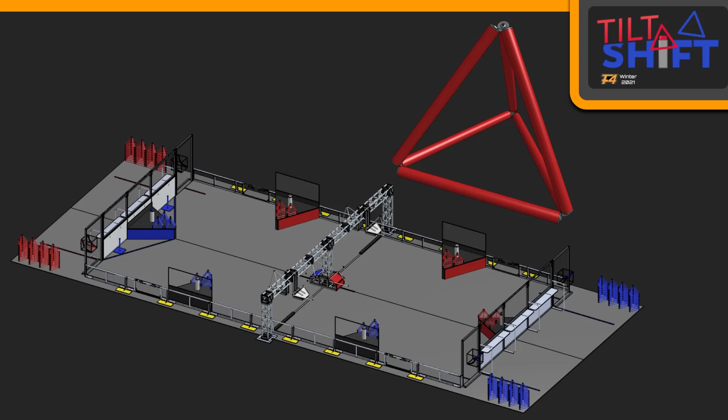Tilt Shift is a game played with 15-inch tetras on shifting goals. These goals can be locked in place by robots, and the tetras can be stacked on top of each other throughout the game. In the end game, the robots are allowed to hold and score up to 6 of the tetras, and they can climb onto those triangular platforms that you can see in the slide.

We've got a couple of first ones up, and unfortunately we weren't able to judge these 2 robots due to some issues with their submission, but we still wanted to show them to you because they're some cool robots.

So up first, we've got team number 423-2702, Rubbles. This team was composed of Fraser Morrison and Lachlan Morrison. Unfortunately, we weren't able to judge their entire robot, but as you can see, they've got a cool elevator and some interesting starts of a mechanism, as well as a swerve drive.

We're going to go through these first couple a little bit quick, just because we don't have much comment because we weren't able to judge them.

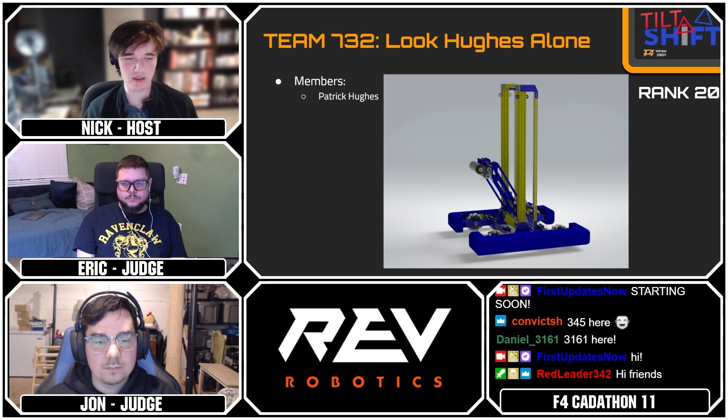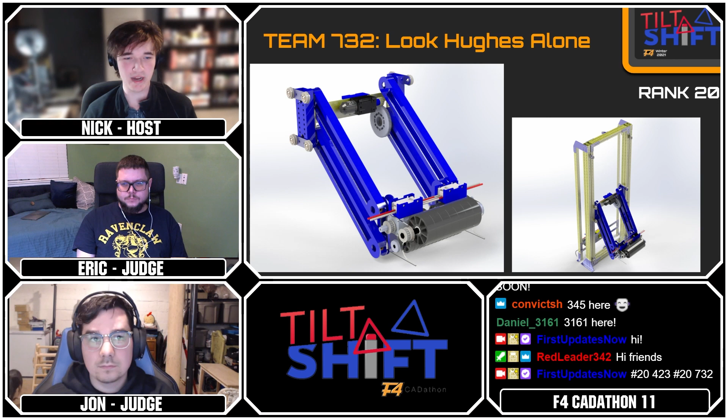Next up, we have tied for 20th, team number 732, Look Hughes Alone. This team was composed of Patrick Hughes, and they tied for 20th. You can see they've got a robot in there as well. They've got a cool little intake with some Spark Max holders on there, as well as a fairly large elevator. Really cool thing, looks very 2017 inspired. It's a cool robot, it's unfortunate we weren't able to look at it closer.

Now, as we get into our actual judging, I want to introduce our 2 awesome judges we have with us tonight. Right below me, we have Eric from Rev Robotics and formerly of Team 2826, Wave Robotics. And we also have Jon from team number 1684, Chimeras.

Welcome, guys, to the show. Thanks for having us. Yeah.

So these guys took a look at the judging. I did not do any of the judging, I will be interjecting and talking about some of these robots because I did look at them, but these guys did the real looking and scoring.

So let's get up to our first team, team number 403, which is made up of teams from 4561. What do we got to say about this guy?

Yeah, so it's definitely simplistic. I believe in their submission they said they didn't have a ton of time, but they were going for a simple passive mechanism so that way they could intake the tetras and then quickly deliver them. Very straightforward drivetrain. It was interesting that they went with 6-inch wheels. I don't know if that's because of the bumps in the middle that they were concerned about getting hung up on there. But yeah, just pretty much a pretty simple robot overall.

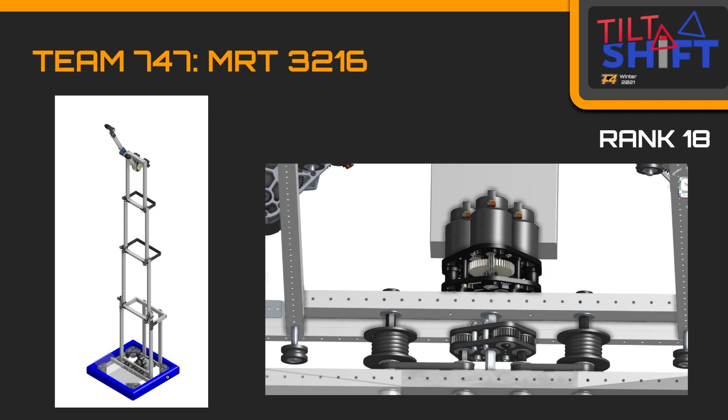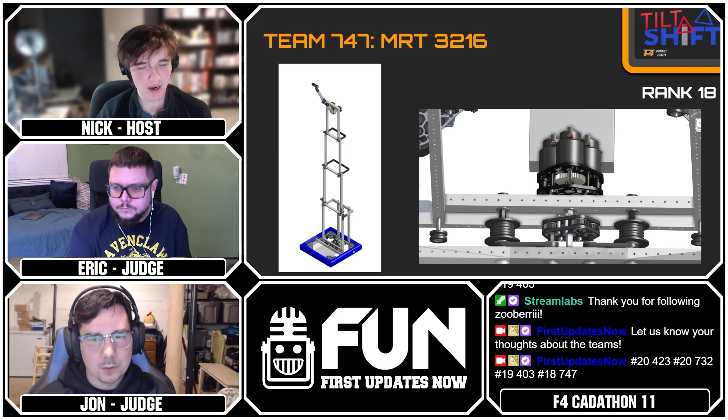The actual winching for the elevator was very cool, the way they had that set up. And the drivetrain was just really awesome too. I don't have a zoomed in picture of that, but I believe that was a swerve drive on that one. I don't know, Nick, if you remember if it was a custom swerve or if it was like the flipped MKs or something like that.

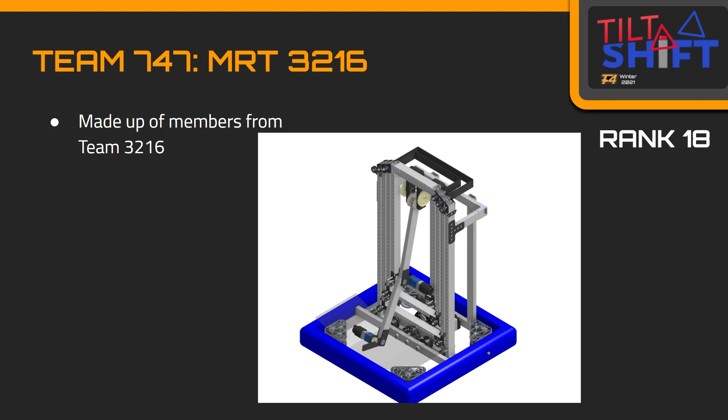It's always nice to see a robot that really takes the design of their elevator seriously, because anyone who's built one could tell you there's a lot that goes into doing an elevator in FRC well. So it's a cool stab at it on this robot. It's a really large elevator too, which is kind of interesting to see. Did they say they were trying to carry more than one? Maybe that's why it's so big.

Yeah, these Tetras were rather light compared to 2005, when they were like 9 pounds. So if I remember correctly, they were trying to go for reach. I don't know if one of the team members is in chat and can correct me, but I'm pretty sure in the scouting sheet they were trying to go for reach, and possibly stability. I want to say there was one robot that mentioned having more stages so the bearings would be closer together when it extended, which was an interesting approach.

That makes a lot of sense in this game, because it involved potentially very tall stacks at the high level, where the high goals started at about 5 feet in the air and got taller as you stacked more Tetras. So it's always good to think about that.

MK4i, they said in chat. That's what I thought it was. Yeah, really cool modules. It's cool to see some of the new swerve stuff that's been released in the last year show up on these robots.

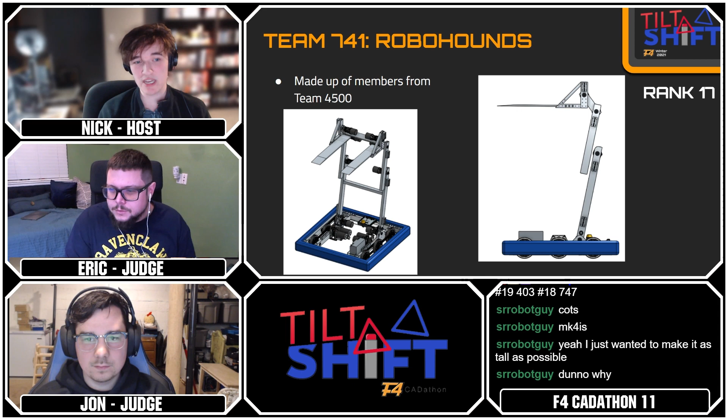All right, so next up we've got team number 747. Wait, not 747, that's 741, RoboHounds. I think it's messed up. This team was made up of members of team number 4500, and they ranked 17th, with the robot you can see in front of you.

This was me, and I thought there was an interesting design—kind of like an elevator, but each stage appeared to have its own powertrain. Then they had a passive intake on some arms, and I wasn't quite clear how they were planning to actually get the Tetras off of everything. I think maybe they were just hoping to put them on a stack and then drive back. But I think there was a little too much degrees of freedom in everything they designed to really make this a top level robot.

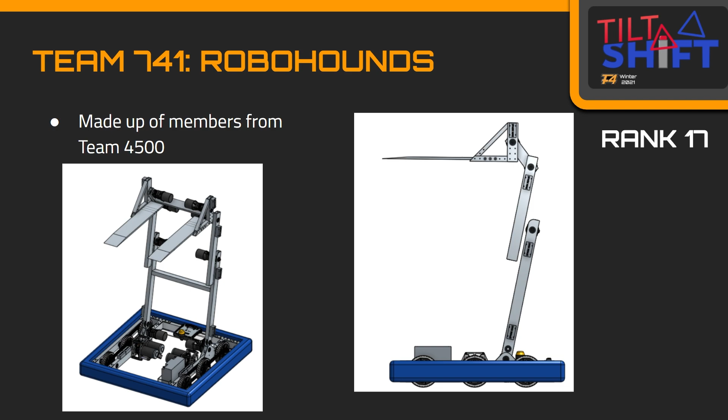I think hopefully they learned a lot of stuff, and ultimately that's really the goal of this whole thing—to expand your CAD skills. So interesting design, and there were scoring opportunities for that kind of low robot in this game. Going low was not necessarily a bad choice, especially if you were intimidated by the concept of one of those big elevators or something like that.

All right, so next up we've got team number 746, Mech Tech Dragons, made up of members of team number 422. These guys ranked number 16. This is me again. This was another simple robot—they were just grabbing Tetras and kind of pushing them off as fast as possible.

I think they had some good details. They were one of the only ones I saw and judged that actually designed bumper mount brackets—a lot of them just put bumpers on and they're floating in space. So they put details in places others didn't, which was good, but I would have liked to see some more detail up top. Great color scheme though—black and green is always good.

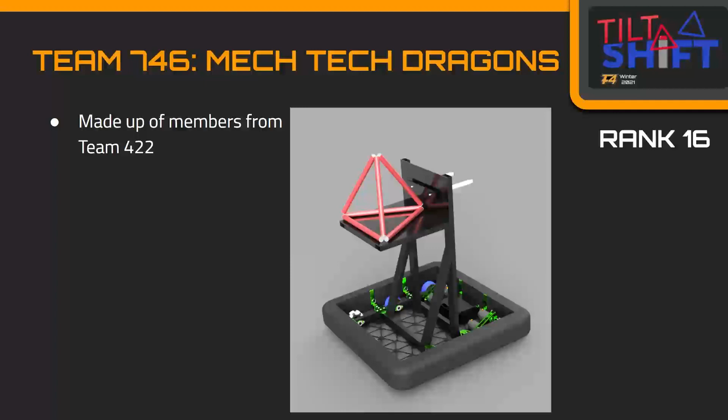Excellent color scheme, and overall not a bad concept. In a lot of games you could see teams load directly from the loading station without picking it up from the ground, and score as simply as possible off of that. Not a bad call at all strategically.

Next up, we've got team number 516, Alarm Clocked, who ranked number 15. Team number 516 is composed of Nathan Shepard, and we have one very long boy in that picture. This wasn't fully designed or fleshed out, so I had to kind of look and guess how they were attaching everything. The intake was interesting, and I'd like to see it built to know how it would actually interact with the tetras in a real life situation. I think they spent a lot of time on the intake and might have just run out of time on everything else.

Did it look like the intake was fixed at that angle, or could they rotate it? Do we have a better picture at all there, Tyler? No, okay, we do not. I don't remember, I'd have to pull it up again. I'd be curious if they were trying to be able to dump by rotating it around or not. Because it's angled, so it's angled with the tetra, I don't remember if it was articulated or not.

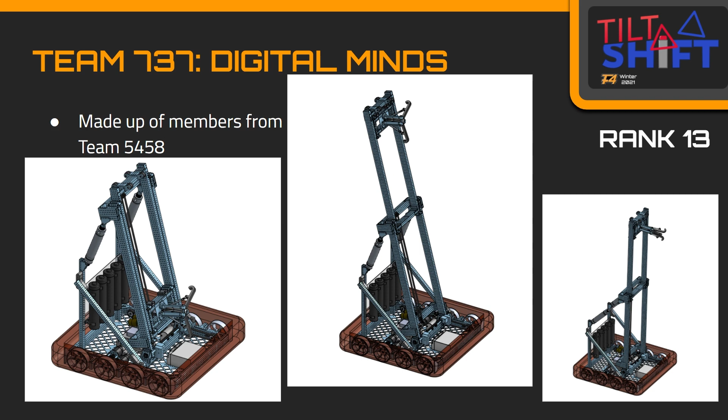Yeah, this was another one I judged, and I would have liked them to show some screenshots with their intake engaged with the Tetras, because I'm not entirely sure how it works. I think they're kind of trying to grab the two sides and a bottom, and the amount of lining up that they would require to always be where they need to be to grab it would slow them down. I think that was one of the limiting factors. Everything else was really good, but the intake - that was kind of a running theme on more things I judged - all the intakes I felt needed too much accuracy and lining up with the Tetra instead of just grab and go, especially in a game where the defense is pretty limited.

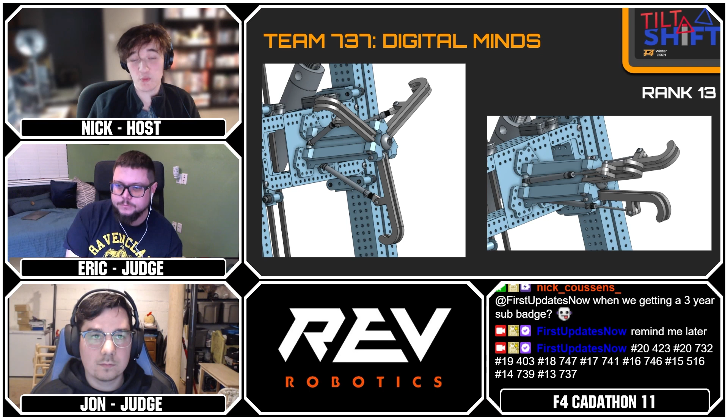Yeah, I dug into this intake a little bit, and it's a really cool little linkage type intake deal, right?

That kind of hooking and action is really fun to see in teams that use that mechanism. It reminded me a lot of some of the hatch grabbers you saw in 2019. Well, for these you start stacking the game pieces up, and if you look at the screen, it's closed and holding it, and when it goes to let go, it's going to hit all the pieces it's putting the next one on. So I think it's going to get stuck. Yeah, that's tricky stuff, and if this game was played for real, it would be a very hard game because of that.

But I liked their banks, like their nice air tank bank. I liked that they had an angled, articulated elevator that allowed them to get a taller elevator to start, so they could have fewer stages but still get the height, all that stuff. So there was some good forethought in there. Very cool robot, nice job to team number 737.

Next up, we've got our 12th ranked team, number 751, Team Electron, made up of members of team number 3928. This was one of the robots I judged. I liked the combination of short elevator, long arm, though I felt like the pickup may take a little bit to line up. However, once you had it, I thought compared to some of the other robots in the CADathon, they did a good job of trying to capture the sides of the game piece.

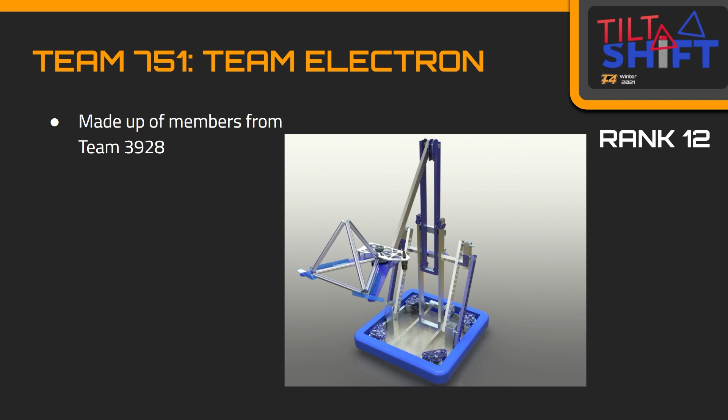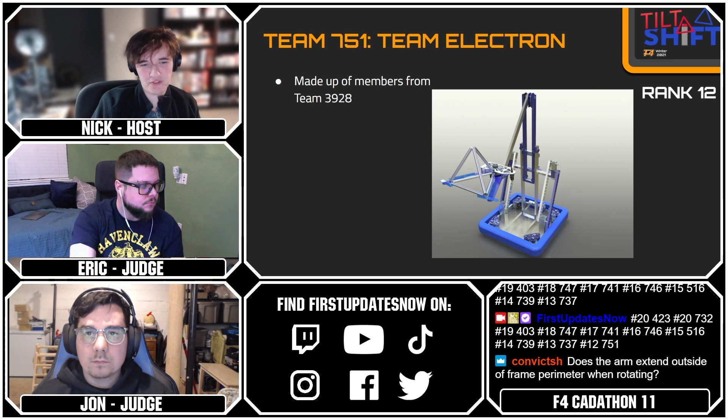And as far as placing goes, kind of like what Eric was just saying, as soon as they set that on and let go, they're hands off and it's free and clear. They also went with a swerve drive, and if I remember correctly, I believe that's a suction climber on the back of this robot. I don't have my notes pulled up, but yeah, I believe so, suction climber on the back. We saw a lot of those, at least a couple on my side, so a lot of teams taking inspiration from 2019 in a few different ways.

Yeah, and I think that kind of placement mechanism, like being away free and clear, that's something several robots might have had good grabbers for, but they didn't necessarily have good placers. In order for them to score, the piece needs to be on something, right? Getting them is only half of the battle.

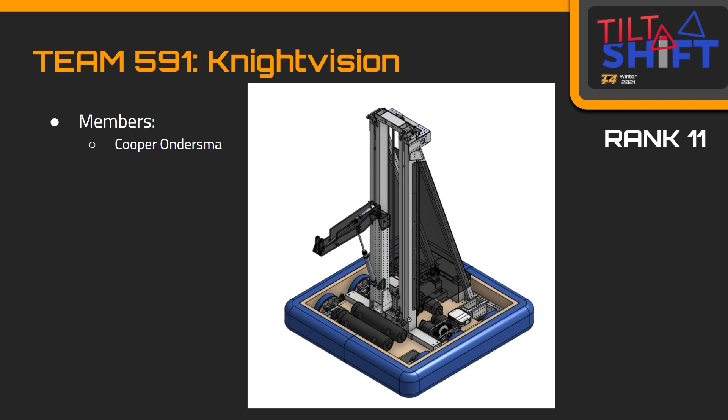Very simple mechanism as far as placing, it goes back and forth, where you don't really know how well it would work until you actually built it and tried it. But for this one, I figured if they had something hooked, they went up and then retracted the pistons or folded down, they would be able to clear before colliding. I don't think they would get entangled or anything. And then a really robust elevator with good elevator mounts, which is always nice to see.

Sometimes people will mount an elevator and put very little support, where here they did a good job of adding that extra support, and the paneling on the side too just ties everything together. Then the elevator motor looked fast, I don't know what the gearing was exactly off the top of my head, but it looked fast. We've built fast elevators, so I like fast elevators.

I think this is a really good example of that kind of meat and potatoes, tube and gusset style robot, where it's really solid, it just looks very solid. And as much as I love seeing swerve drive on robots, it's also nice to see when teams commit to just something simple, and that's what they did with the drivetrain, just a super simple drivetrain that looked like it would work really well.

About 1 second to full extension, that's what chat just said, copper131 just said. Nice. So great robot, Cooper.

Really cool one to look through.

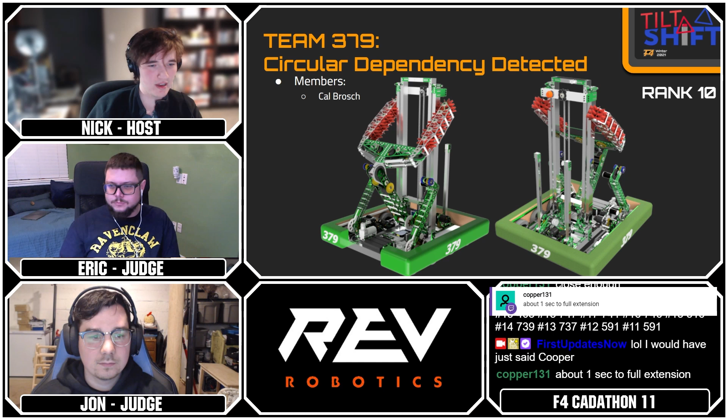Next up, we've got team number 379, Circular Dependency Detected, which is composed of Cal Brosch, and I'm sorry if I pronounced that name wrong. They ranked number 10, and this was a really cool robot to look at and poke around with. I think Eric, you judged this guy.

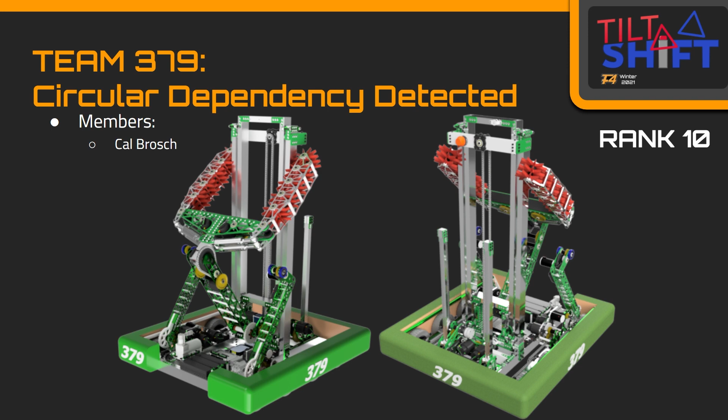I did judge this one, and I think they were one of the most complete robots, a good climber based off of the 2019 climbers trying to get up on level 3. Tons of detail, fantastic all around, but there were some things that I thought limited them, and one of them was the intake was massive, and I actually don't think it holds the Tetras at all.

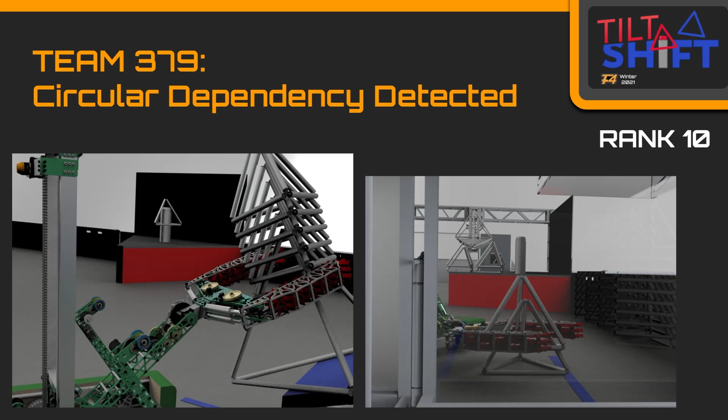Because I think they come on the outside, and all those stars, I don't actually think they're gonna hold them the way they think it's going to. I could be totally wrong, but if it does hold it, I think it will be relatively good at taking, actually scoring and placing everything.

And I think the kind of images that showed up in here with kind of stacking them in place also, I think that kind of strategy is interesting, right? Because doing stuff outside your robot is always a little bit of a risk, right?

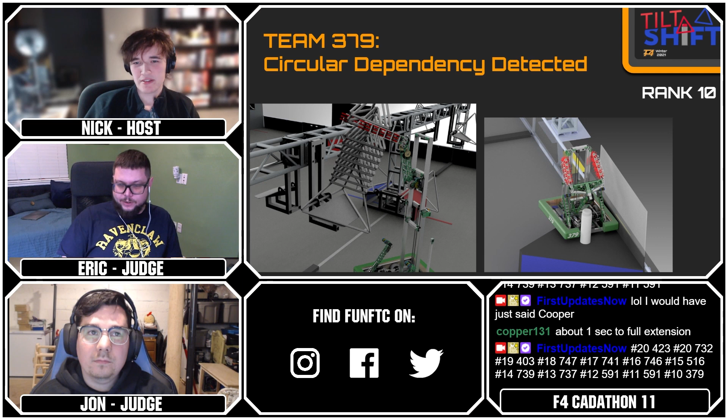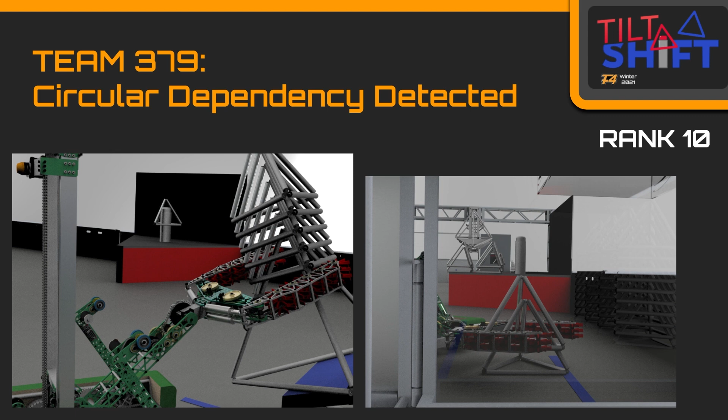Oh, absolutely. And it's also a lot of weight to manipulate and everything, so they're going to be draining a lot of power. So hopefully they have enough power at the end to actually climb. It does look like they have pistons on the back, so it does intake, kind of a pinching action going on. So it might be able to compress and hold those, but I don't think it'd be able to compress and pull them in. Very interesting.

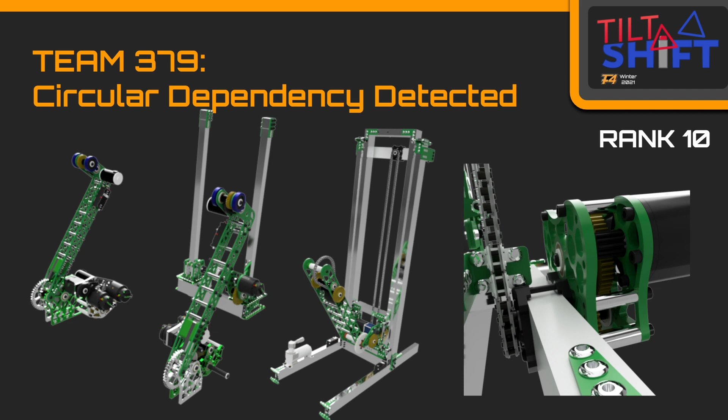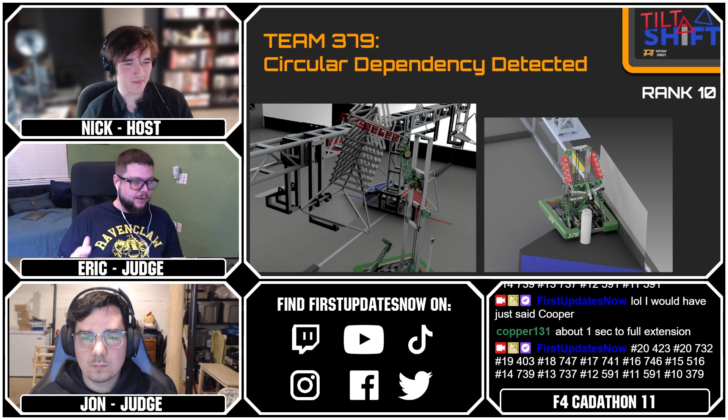And I took a quick look through this one. I've seen some 379 robots in my time, this is a good 379 robot, really cool, really well designed. I ranked them high on manufacturing and detail. I kind of docked them a little bit on strategic design and execution, just because of how massive the intake was. But as far as competitiveness, I thought it'd be pretty competitive, and obviously it's a well designed robot CAD wise.

All right, so next up we've got team number 362, Confused Diesel Mechanics, made up of members of team number 2168. These guys ranked number 9 with that very cool little robot.

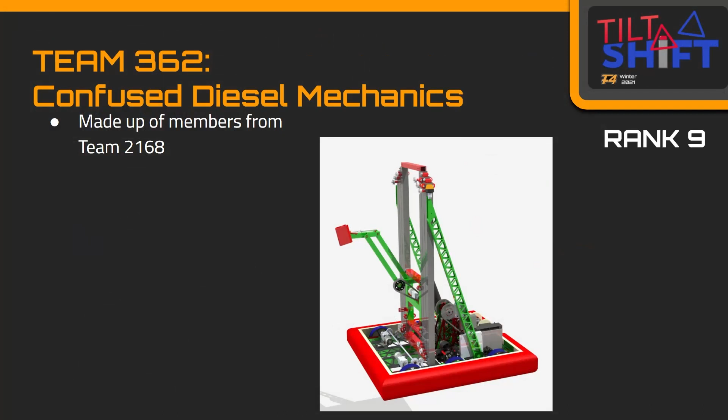This was me again. I don't remember a lot about this robot, looking at it again, this was probably one of the first ones I judged. That's why. But there it is - yeah, the 1114 climber from 2019. Relatively simple intake, and then just a nice elevator, and I think they really excel at climbing. I think their goal was to get up and get down off the platform, so that's why they went with this thing. Overall I think it'd be a pretty competitive robot, with some good design choices and simplicity in places where simplicity makes sense, and complexity where complexity made sense.

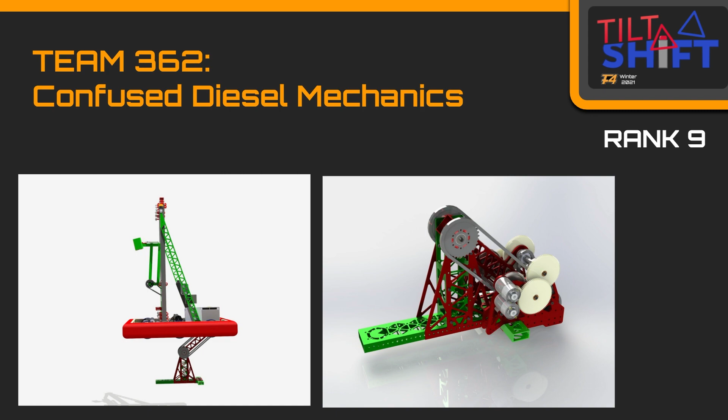And I think one of the things that struck me with this robot is that it also genuinely felt complete. You can see that intake, right? It's not the most complicated intake that we saw here, but as a package, this robot felt like it was designed consistently, like they thought through every bit of it. I think the intake would be the limiting factor, because it's like a clamper, so you got to grab and really be well aimed. But otherwise, everything was good.

And there's lots of cool little hidden details in some of the cutouts and stuff. Like one of the pictures you saw, there was like Pac-Man stuff. So there was some cool stuff in there.

All right, and next up we've got team number 744, Harker Robotics. This was a team made up of members of team number 1072, and these guys ranked number 8.

Yeah, so this was one of the robots I looked at. Very complete elevator, it was very fleshed out design wise. The manipulator was relatively simple, nothing crazy. I had a weird arc too when looking at some of these robots where it's like, oh, on this robot it totally makes sense, just have a stick that you're gonna hit and then be able to set down the Tetras. And then some of the robots did like the Batman grappling hook and stuff. But yeah, very complete elevator, they did bumper mounts on this one.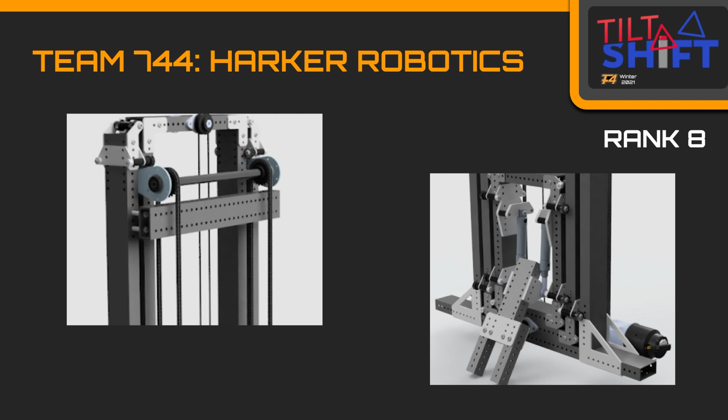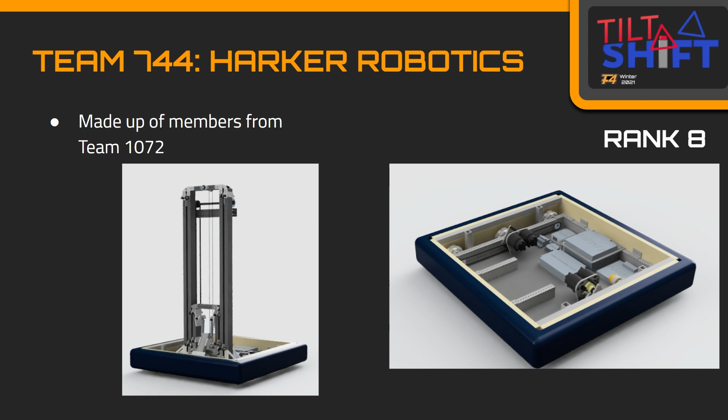But overall, it just seemed like a very robust, simple, straightforward robot that I don't think you would run into a ton of issues with at a competition. The elevator bearing blocks were really solid too. Everything looked like you could fabricate it with pretty simple means. Honestly, just being able to say that about a robot designed for a CADathon is impressive. I would expect this robot to function as designed, for a game that they had no prototyping for. So like, I agree, they thought about the things that they needed to think about with this robot.

So somebody just mentioned, how does that arm reach the Tetras? From my point of view, it looked like they could get it from the human feed station and then be able to stack it up on top of the main middle goal. I think they would struggle probably with the deeper post goal, but yeah, I don't believe that would work. So they wouldn't quite be able to do that.

All right, next up we've got team number 566, Sigma Motion's Uprising. This is made up of members of team number 2658, and they ranked number 7.

Looking at this robot, the manipulator was very interesting. It's similar to some of the other ones we saw where it looked like the jaws would open up to clamp, but then you could lean it back so while you're driving around you're not going to lose it. They did a swerve drive, just the MK4s I believe, and then a suction climber.

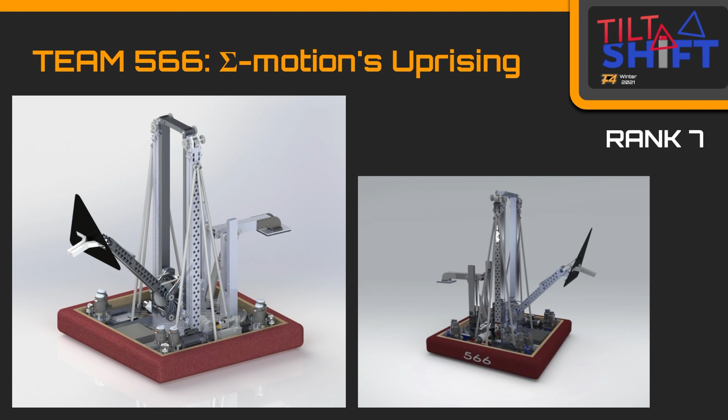The kind of unique thing with their elevator is their supports. They did a lot of these thin posts. I would assume that would be fine because we've done thin posting like that before, but I don't know how it would hold up when you're all the way extended if you took a really hard hit or something. I kind of like some of these robots that use shorter elevators with a longer arm. I think for this robot, your elevator could probably have been even a little bit shorter too. But the elevator did seem pretty fleshed out, and they had a lot of components laid out, so I felt like you could generate a bill of materials from this robot relatively easily.

And that kind of cross bracing stuff isn't something that we saw in all the robots. We've seen some of the elevators before, right? And that's a pretty clean way to do cross bracing, versus those kind of crush tube type bracing.

I think the only thing you're really missing on their suction climber is an actual reaction point. Right now it looks like all the weight would just try and pull it up. They needed a cantilever point for the suction to really do its work. That was the magic sauce.

I think it was interesting to see the variety of how teams did the suction climber and how close they were to what actually worked in 2017 or 2019. The reaction point was one of the things, and I think one of the other big things was the surface area you were using to actually do the suction. Some of them ended up a little bit on the small side in this one. But yeah, a very cool robot there.

Next up we have team number 607, Harkur Robortics - got to pronounce it right - which is composed of Alexander Liou, and he ranked number 6 with a very cool robot.

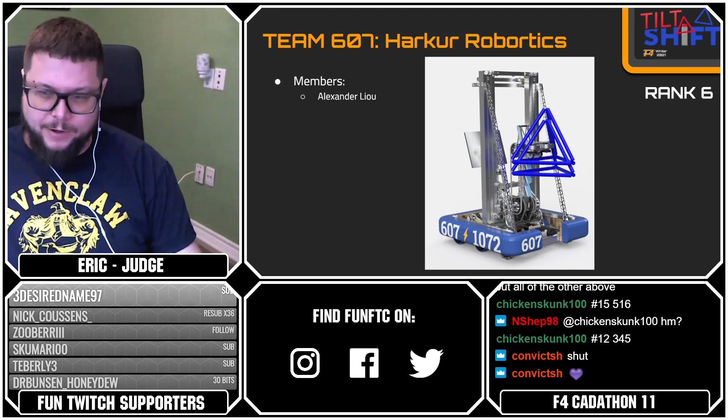Yeah, very cool robot. Big suction climber, and then a well thought out elevator arm on an elevator so they can reach out kind of 4-bar-ish. And then there's another thing, just wheeled intakes.

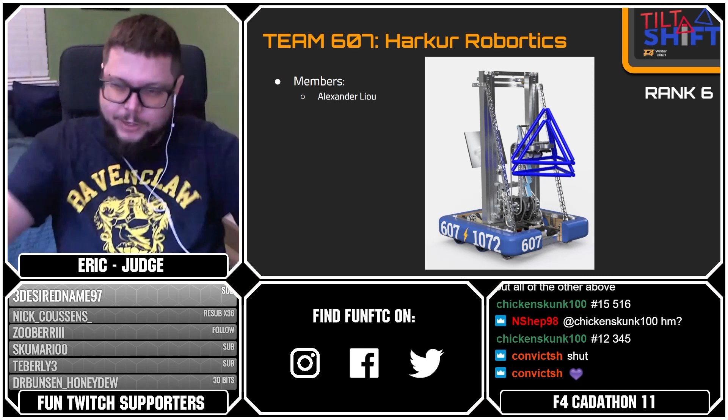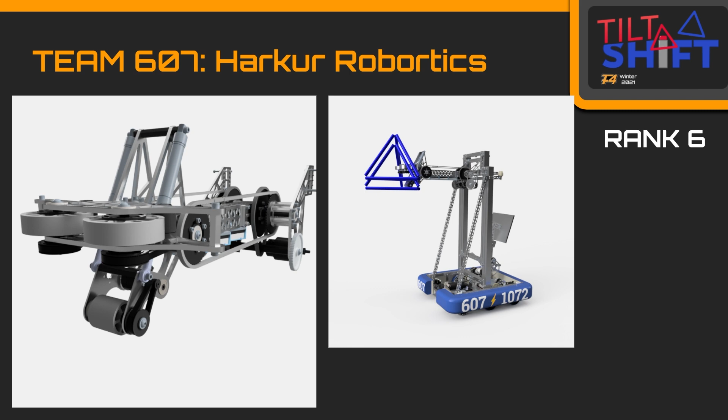I'm not sold that they do well with this. These are something you just want to kind of go in, or you can grab from the outside and you want to release them. But I'm not entirely sure this is going to hold it, because this is like 2019 hatch mech. They did do a lower roller to try and keep the Tetras from falling down, but I feel like one quick turn when you turn around, these are gonna go flying.

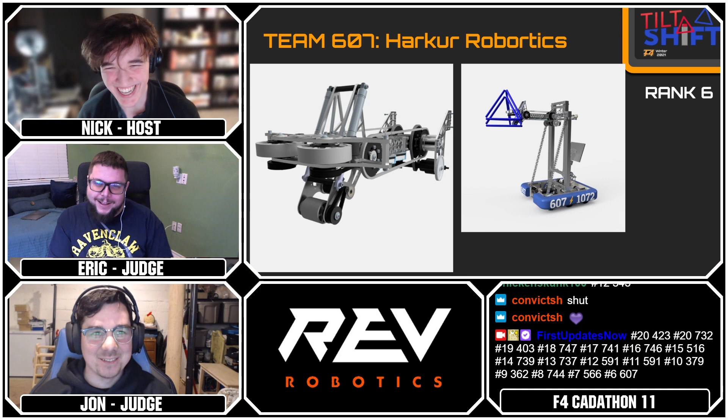I know those compliant wheels were super sticky, and I could be totally wrong, I'd be happy to be wrong. But that was my whole thing - I don't know if this would actually work. Everything else was great. I might be biased because of our 2019 robot.

The center of mass on these Tetras, granted they only weigh a couple pounds, is in front of the wheel, so it's always going to want to be leaning forward. I think it would depend on the engagement from the backside of the curve of the wheel to the actual wall, how much that Tetra would come into that. If it came in like well over half, you would probably be fine, because that was the trick with the hatches, and I think some of that would carry over to this too.

It also feels a little bit sensitive to where on the Tetra you're hitting it, right? It doesn't seem like on this one you're intaking it - you're going to drive into it, lift up, and then pull out. With the hatch it was always in the same location - you drive into it and suck it in. But you're probably sucking while you're trying to lift, and that would kind of lock it into place, I would think.

But yeah, I mean the elevator was lots of great detail, well thought out. I think it'd be really robust and fast. Suction climber, good surface area there, a place for reaction and everything like that. So I think it would do well.

So yeah, awesome job, Alexander, on this robot. That was especially impressive being one person doing this all by themselves. That is a very impressive robot.

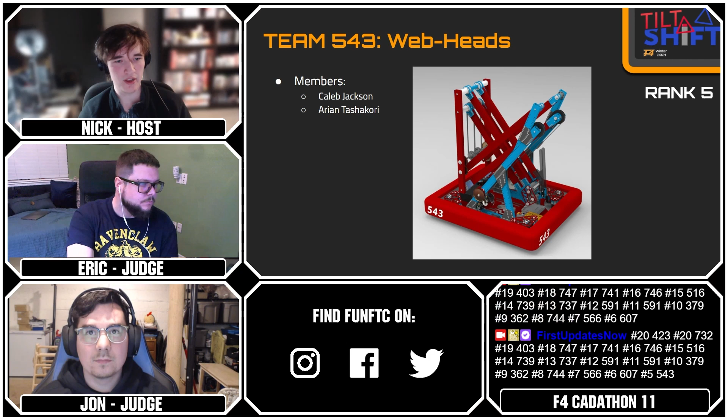Next up, we've got team number 543, Webheads, who ranked number 5. Webheads is composed of Caleb Jackson and Arian Tashakori, and great color scheme just to start out with, right? Yeah, major style points for this robot, that's for sure.

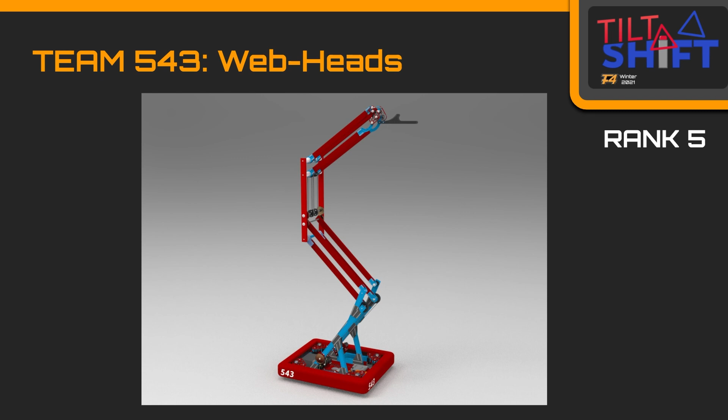So the big thing that I liked about this robot was, in practice, I haven't seen the reverse 4-bar implemented a ton in FRC, more in like the smaller Vex or FTC type robots. So I was looking at this one, and minus a couple of points where it looked like they maybe forgot to add a spacer or something like that, this seemed like it was very feasible.

The pickup mechanism seemed pretty straightforward, just a simple kind of stick pickup, drive around. Like I said, I think with this game it's very difficult to design a good wheeled mechanism, kind of like what we were just talking about. So having a simple mechanism where you can drive in, have a big area to shoot into, hook, and then drive away - I think that's an advantage.

From what I was looking at with the gearing, this looked fast. So I think they would be able to get it up, place it, get the robot packed away, and take off super quickly. Yeah, that was all basically my thoughts as well. Loved that it was simple - just drive in, lift up, drive away, run away, right?

I mean, their thing did have a little bit of - so it could kind of pick it up and go. My only critique is the double reverse 4-bar - there's a lot of weight when you're up top, so you got to be really conscious. I don't want to drive around with this way up in the air. I've got to bring it down, so it's got to be fast up and fast down to make sure that you're never in a place to easily fall over.

I'd also like to call this out just because I looked at this robot, and unfortunately we don't have a picture of it, but there's a really cool Spider-Man cutout on the bottom, on the base plate of this robot. Major style. A+. Very, very cool thing.

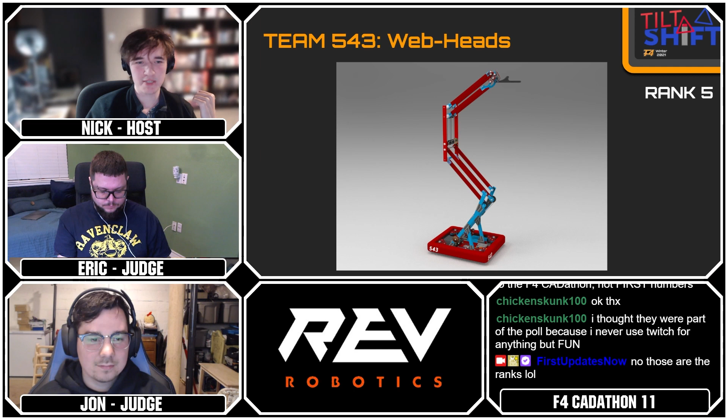Awesome, very cool. Next up, we've got team number 735, and I'll do my best to pronounce your name. Team name: Drop Table, Bobby Drop Tables, I believe.

These guys had another very stylish robot. It was very hard to see though, because it's so black. I think they made a joke on their scouting sheet where they said that it's purple, and boy is it purple—they definitely leaned into that hard, which was awesome.

So they're running a swerve drive. Their mechanisms seem like they'd work pretty well as far as being able to attach and detach. The only concern I'd have is if you got into a situation where you racked it or had a collision—I could see bending piston rods. They did attempt to protect them, but I don't know if that's enough protection.

Same with their little robot legs that pop out the bottom—I'd have some concerns about stability with that, but that's stuff you don't know until you actually build a robot. As far as the CAD is concerned, it's very detailed. I believe they even ran wires on this robot in a few places.

So they were very, very detailed. They just did a fantastic job. A lot of the gusseting stuff was just awesome. And I believe those middle black posts, believe it or not the not-purple posts, are lead screws—they'd screw those down to lift themselves up to get into a climbing position.

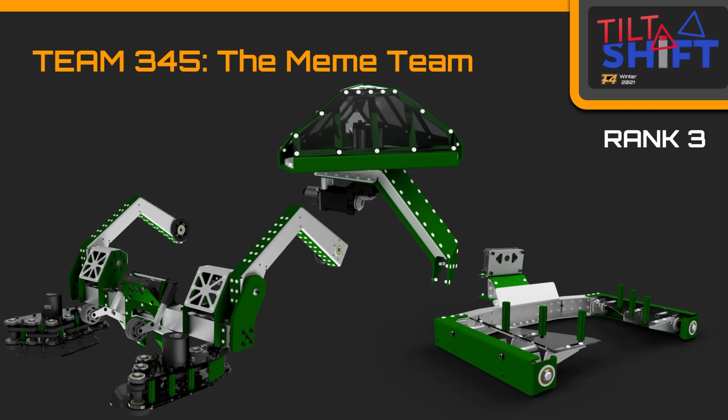And everything, and then they build stacks on the robot, which is great. Lots of teams in 2005 did that as well. Everywhere you look, detail is in here. They were like the only team that actually put CAD in the sponsors and stuff like that. So I think if we had a wow factor above 4, they definitely would have gotten whatever the max was, because it was all there. This robot, if you had a question, it had an answer for it. Every mechanism on it, to the Tetra turner, I thought was just fantastic. Just a ton of detail.

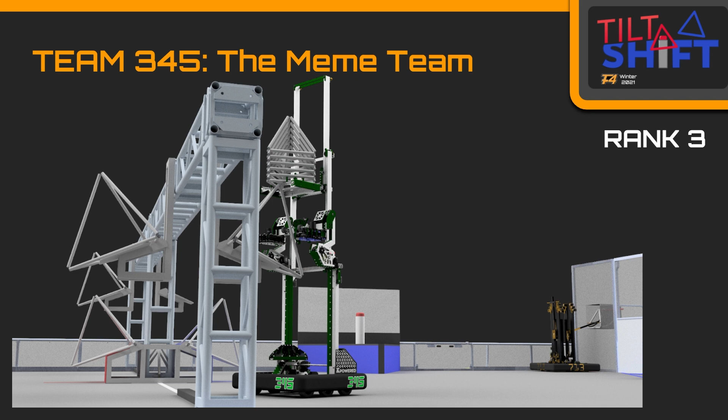I've never judged a CADathon before, so this was my first exposure seeing all these awesome robots. And this was actually the first robot I opened up, and I was just shocked because I was like, man, this detail is just fantastic. So I was just really impressed. The elevator was really cool. Like Eric was saying, the handoff was just really, really great. It was funny looking at the rendering and then seeing 713 in the background too. That was really great. So overall, really awesome robot.

And I think that concept of building the stacks on the robot, especially for a game like this where you can do the two stacks for most of the game, and then you can do 6 of them at the end—I think that kind of a mechanism really made a lot of sense at a high level of play, as opposed to trying to do it off of your robot or something like that, right? Just because it gives you control the entire way through the process of scoring, in a way that a lot of the robots just wouldn't have had that we saw for this. So awesome job, Kevin.

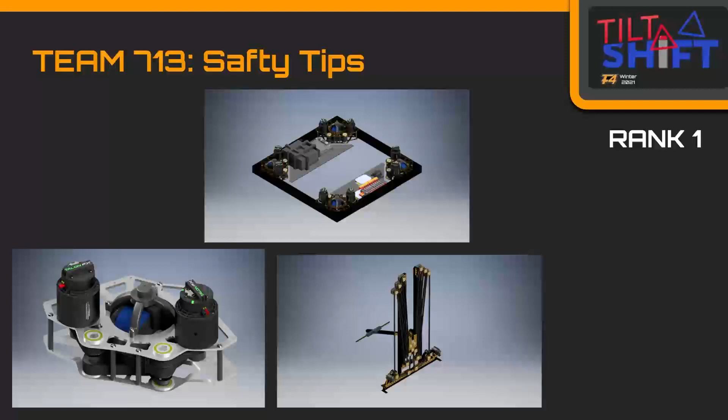I think somebody mentioned when we were talking judging, it's just like the pathway for the rigging for the elevator is probably the one ding they had. It was just a little bit over the top, but otherwise so much detail in this.

This was another one where they thought about it, right? They thought about that rigging, and it's ridiculous, but they have two elevators, so these elevators are going to be light because they have two of them. They're going to fly up and down, turn around and cap again, or cap, drive away, and cap something else. There's so much that they can do with this.

When I saw the robot, I thought, well, why don't they just have one elevator and have the thing flip over on the other side? Then the more I looked at it, I realized they're just trying to optimize the bejesus out of this thing. They're like, you know what, make us a quarter second faster, add another elevator. And just the appreciation of being like, you know what, we already have this really good mechanism, we're just going to copy paste, put it here, and it's going to increase our strategy and scoring potential. It's a fantastic robot. The climb is really cool too.

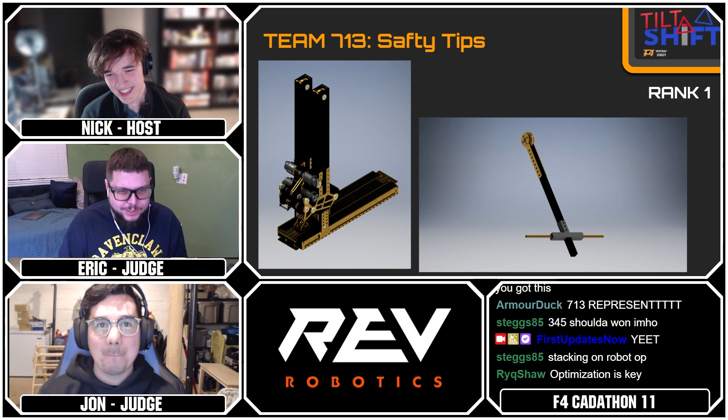Absolutely, and this is one again, what's better than one? Two. Jon judged first, so I read his notes, and his first thing was 'this differential swerve is amazing.' I was like, oh, that's going to be all the robot is, because if you spent all this time designing a diff swerve, that's not easy, that's time consuming. So I was like, oh, this is going to be a cool drivetrain, and that's it.

I was really surprised it was so high, I was blown away. One of my comments was, please release this CAD because I feel like so many people would want to be able to see it and look at it. It was just a really cool concept, unique, and the detail of the robot too, all the other electronics and belt pathing and everything, just overall a fantastic robot, and the color scheme was on point.

In the chat, ArmourDuck says they did it before the CADathon and it's already released. Oh okay, pre-release CADathon, that's it. Alright, good to use, I'll hunt that down then. Yeah, I looked for it, didn't see it, I must have missed that. I think if I remember correctly, they did agree to release the CAD of this robot specifically too, so I think it'll be in there. Anybody that wants to take a look will be able to. I just posted it in the Discord.

Yes, so somebody was talking about how 345 should have won. I mean, 345 had a great robot, I just think they weren't optimized as well as others.

I think there's something to be said too about a little bit of simplicity, right? This robot's manipulator is a stick, and if you practice with that you're less likely to get tangled on things, I think there's a lot to be said about that. For sure, 345 did an amazing job, don't get me wrong, that robot blew my socks off. But if this was like 2005, where you could hold as many tetras as you possibly could, 345 would be one of the best robots in the world, because it's just gonna stack them up and drive away, drop a stack of six over here, still got six on the robot, go drop six somewhere else. So the potential is there, just this game didn't necessarily need to stack on your robot. Still a very, very amazing robot.